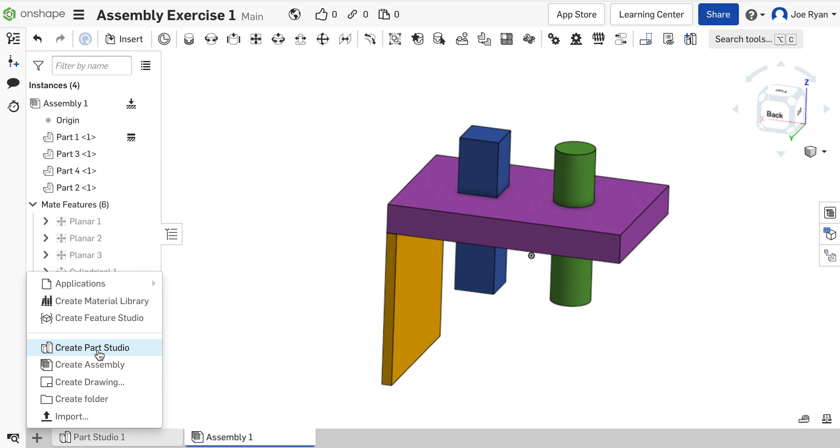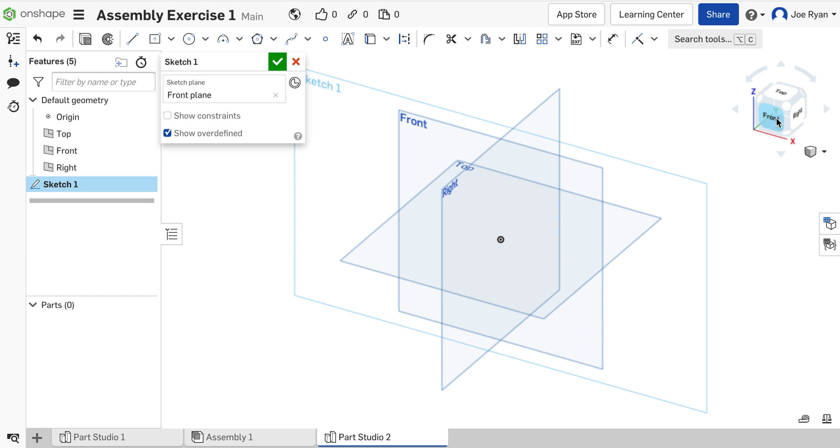Once you have created your part studio, we will be making that rectangular base first. Go ahead and click on Sketch, then select the front plane. I'll click on the View cube to get a nice view of the front plane, and begin to draw my rectangle using the Center Point Rectangle tool from Sketch.

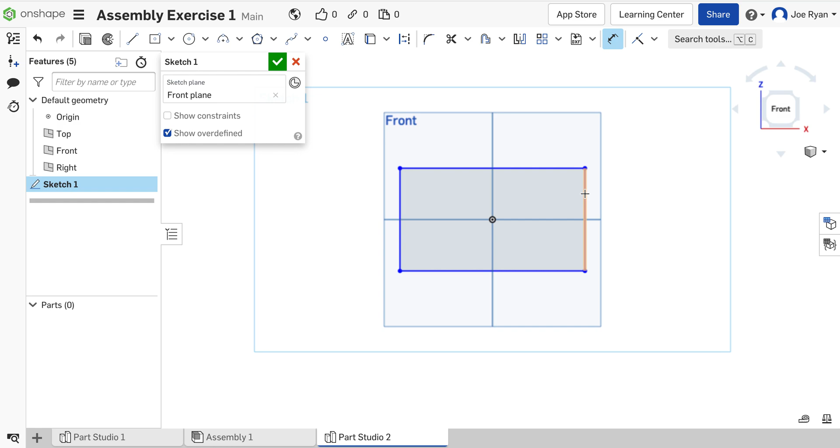I like to draw my shapes centered about the axis, then press Escape. Now let's add some dimensions to our rectangle using the Dimension tool. I'll make it about 4 inches high, then use the Dimension tool again to make it 6 inches long. When you have your rectangle 4 by 6, click the green check mark.

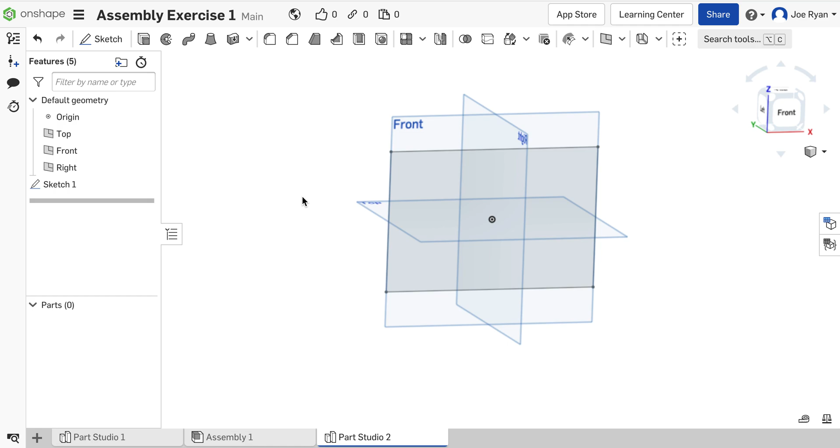Let's add some depth to this part. Click on the Extrude button and select the sketch you just drew. I'll extrude it about 1/2 inch and click the green check mark.

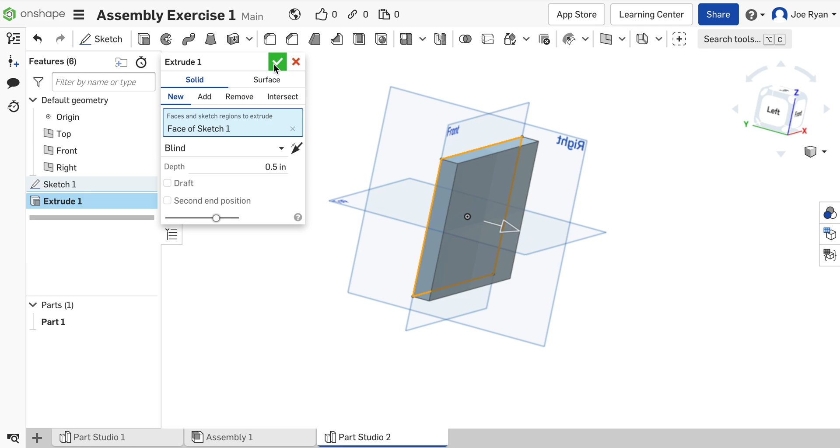The last thing I'll do is change the color of this part. As you can see, I have part 1 down here, and it lights up when I hover over it. You can right click or 2-finger click on part 1 and go to Edit Appearance and choose any color you want. In this example, I'll choose purple, but you can pick whichever one works for you.

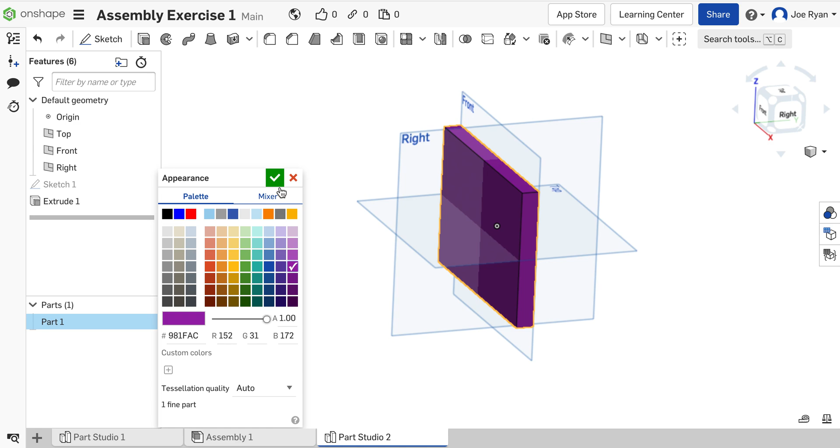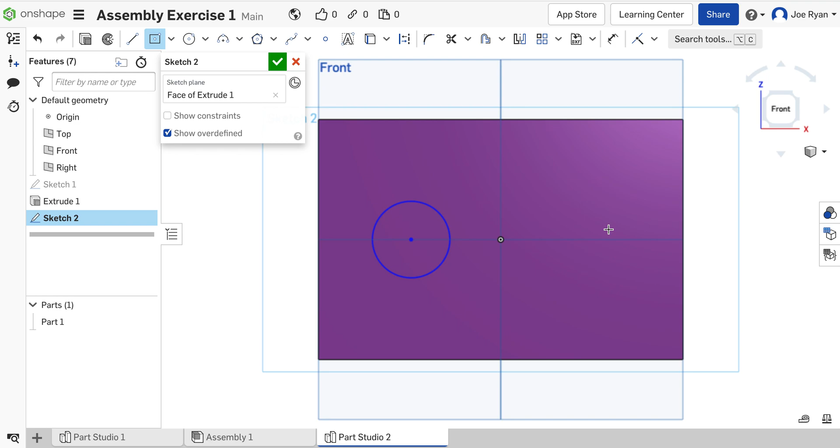Now I need to put a few holes through this part, right? That's where these pegs are going to fit. Go ahead and go back to your front view. You can create a new sketch on the top, and we want to create a circular hole and also a square hole.

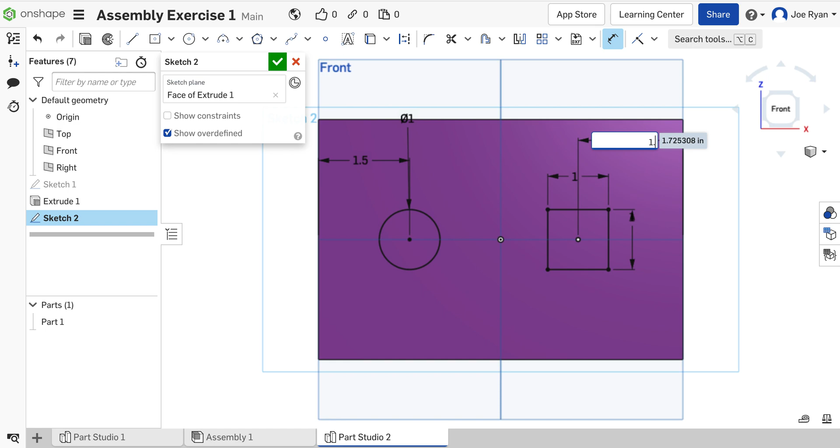Our circle we will dimension to be 1 inch in diameter, and we'll also dimension it to be 1.5 inches away from the edge. Our square will have side lengths of 1, and its center will also be 1.5 inches from the edge. Click the green check mark, and then we will extrude both of these shapes and remove material.

Great, our base is ready to go. Next, we have to create this orange leg.

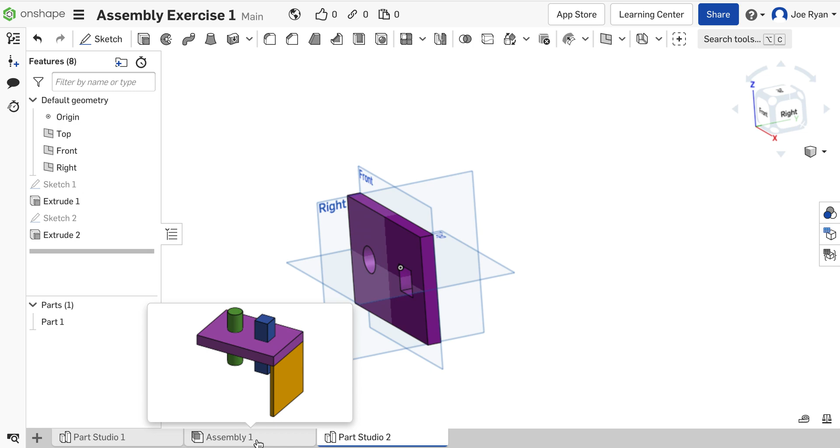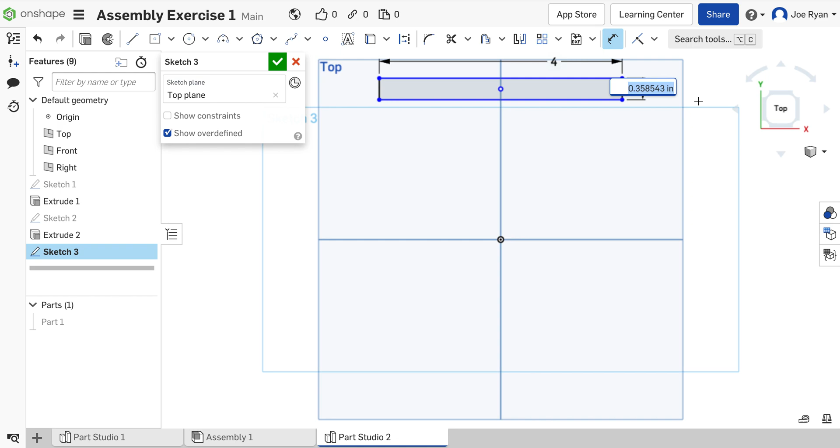What you can do is hover over the eyeball of part 1 and hide it to get it out of the way; we can bring it back if we need to. I'll create a sketch on the top plane for that leg, using the center rectangle command. Let's make it 4 inches wide by 0.25 inches thick, and click the green check mark.

We can extrude that part. Let's extrude it 4 inches and click the green check mark.

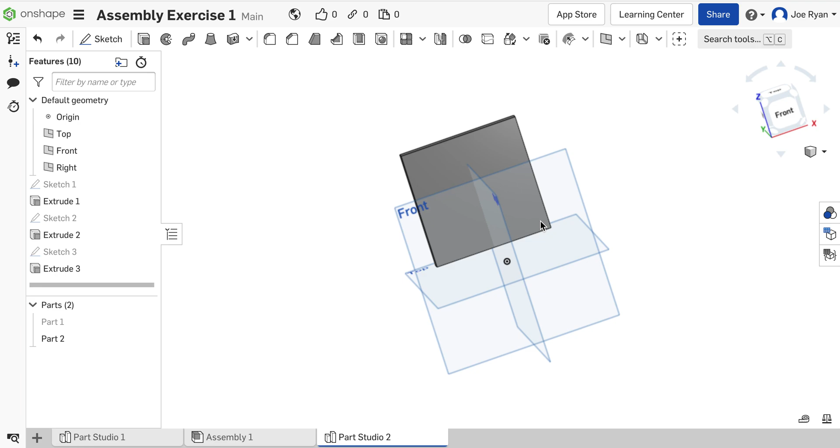Excellent. Just like our previous part, we can change the color of part 2. Let's right click on that, edit appearance, and choose this orange color, then green check mark. All right, I have 2 of my parts.

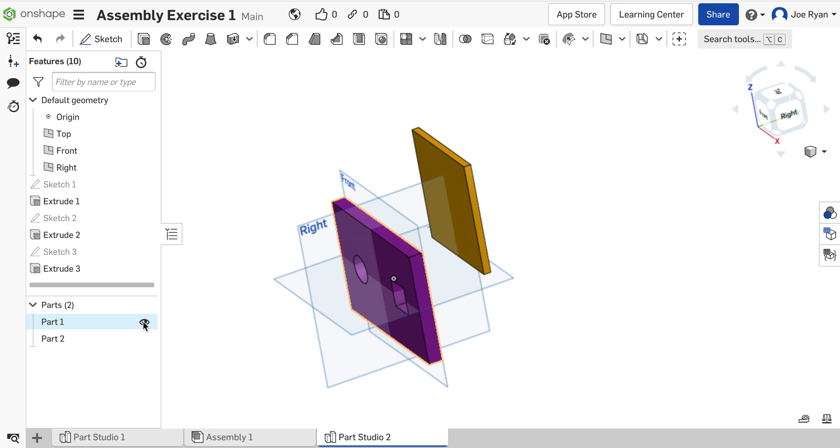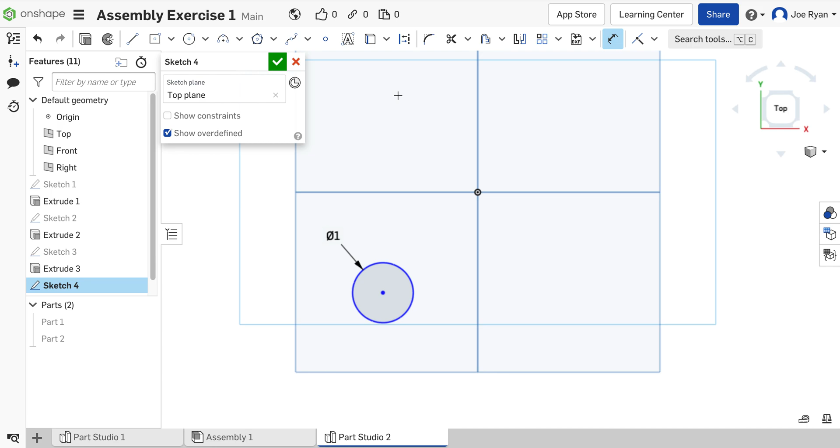Let's keep it going. I'm going to hide these and create my circular peg. I'll create a new sketch on the top plane, use my circle tool, draw a circle, and dimension it to be 1 inch in diameter, green check mark. Just like we always do, I will extrude it, making it maybe 5 inches tall, and click the green check mark.

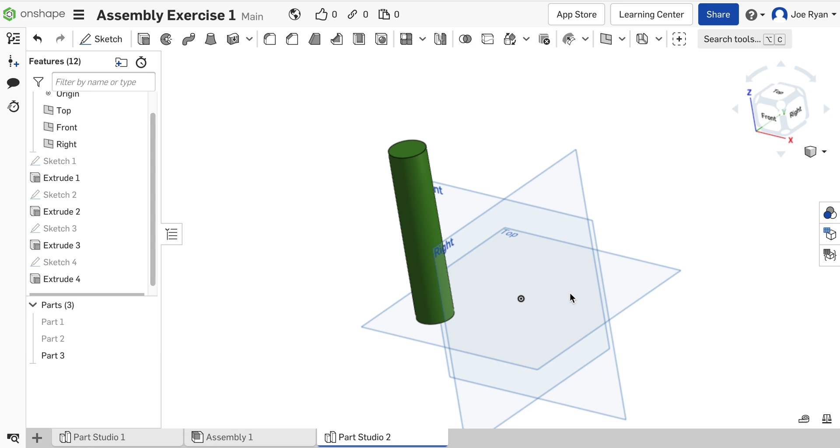Let's see what color I made it. Let's make this green, so you can right click on part 3, edit appearance, and make it green. I will hide part 3, and let's make part 4.

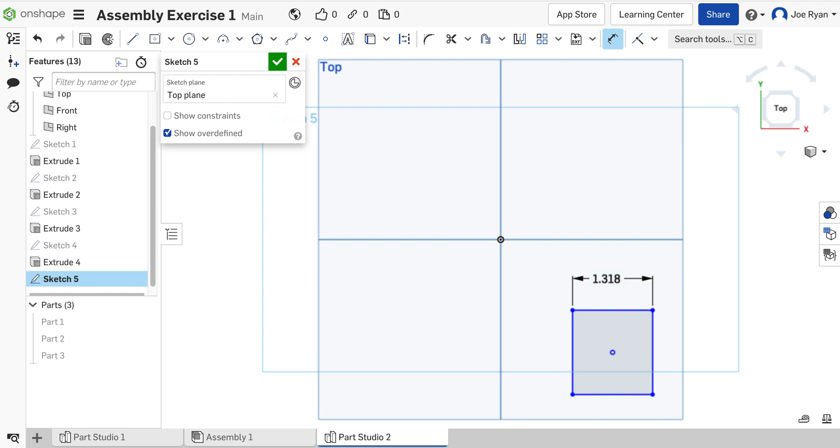Let's sketch on the top plane, top view, and I'm going to make a square peg. I'll draw a square and give each side a length of 1 inch using the dimension tool. Green check mark. How do we make it 3D? We extrude it, and I'll extrude this one to 5 inches as well.

What color to make this one? It looks blue, so I will right click on part 4, edit its appearance, and make it blue. Again, you can make it any color you want.

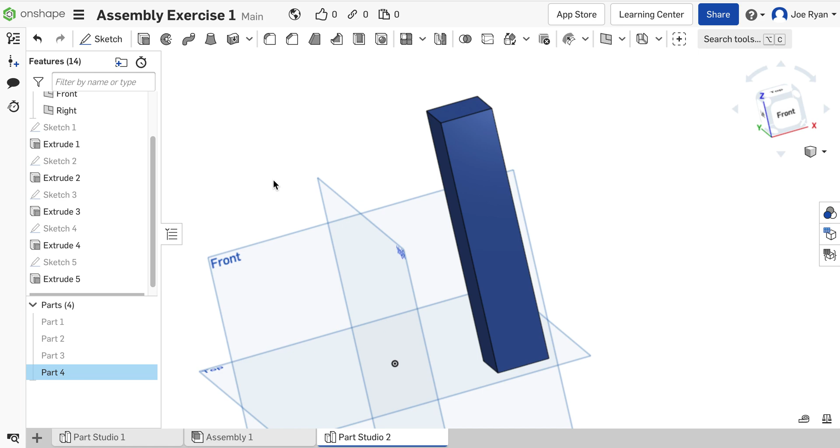So if I look down at my parts list here, I have all these awesome parts. Now I want to see how these fit together. If I was going to 3D print these and put them together, I'd want them to actually connect, and that's called an assembly.

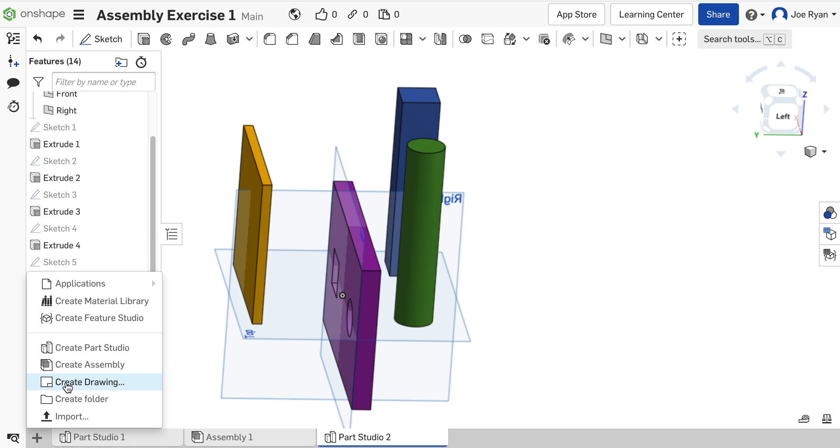So what you're going to do is click on the Insert New Element plus sign at the bottom left and click on Create Assembly. Now you can notice this assembly page is blank.

What we have to do is click on Insert, and we will bring in parts to this area. You can see I have 2 part studios here, but you should only have 1. What you will do is click on the part studio where you created all those awesome parts, and you should see them listed out.

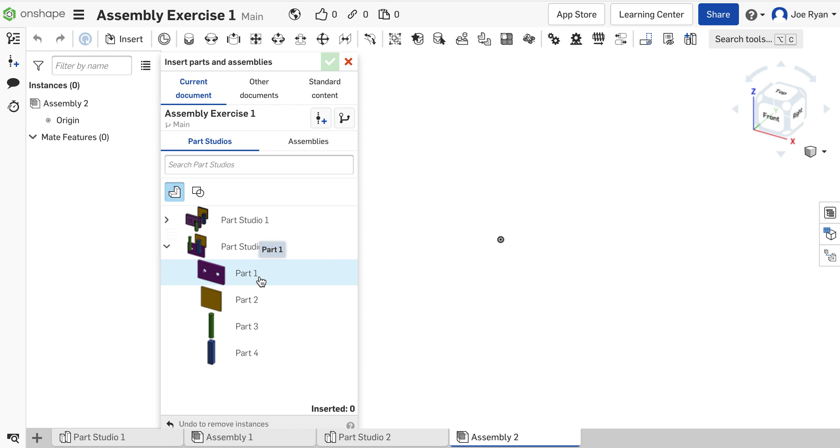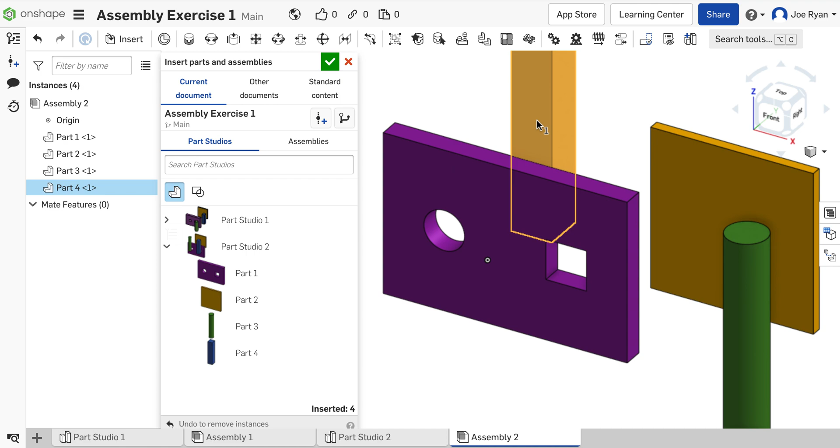You can then click on the part you'd like to insert, then click once in the workspace. I'll bring in the purple base, click once on this leg, and click once in the workspace. I'll click once on the green peg, then click once in the workspace, and lastly let's bring in the square peg. Once you have done that, click on the green check mark.

So you can see all my parts floating around. If you click on any part, you can move it.

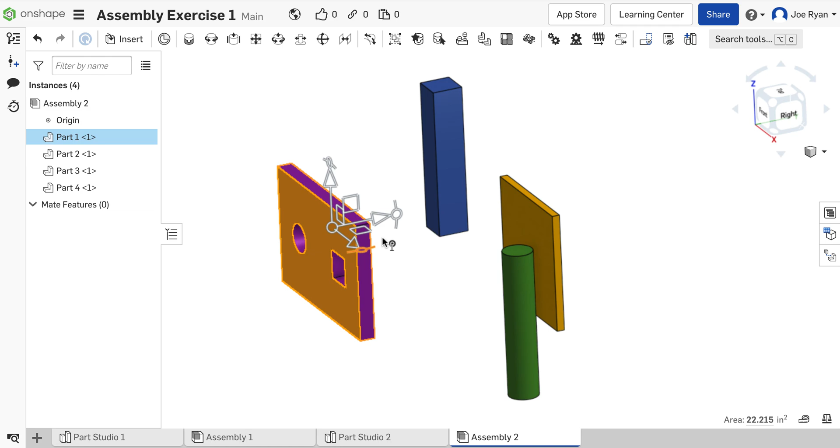I'm going to use this purple part as my base, and I'd like to rotate it. I'll click once on it, and you can see these arrows. If you click on the little circle with the lines in it, it lets you rotate your parts. I'll rotate it so it's facing up and down, then drag it out of the way.

Now I don't want this purple part to move around while I'm placing the pegs inside of it, that'd be kind of difficult. So I can do something called fixing the part, like nailing it down or gluing it down so it won't move around on me. To do that, I'll right click on the part and select fix.

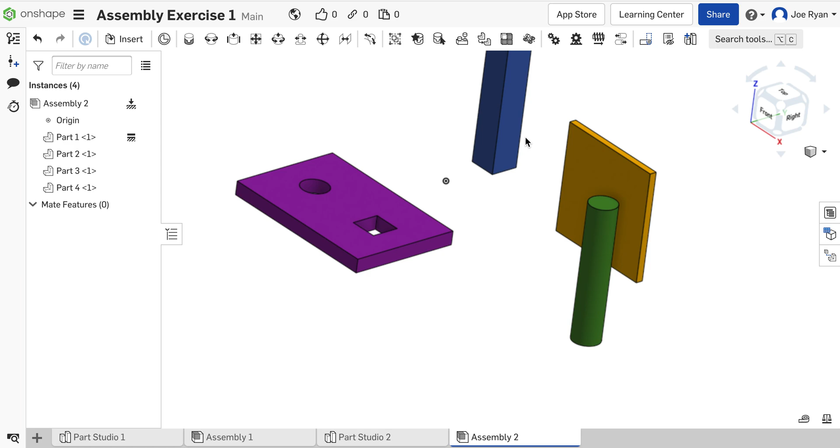Now, how do I bring in these pegs to mate with this part? That's what all these buttons up here are for. We're only going to be using the Planar Mate and the Cylindrical Mate. You can experiment with the other ones if you'd like. But let's first connect this leg to this purple base.

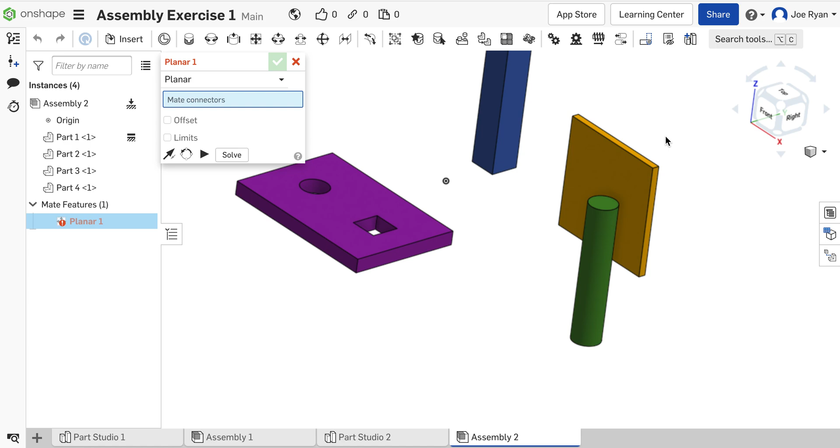To do so, click on the Planar Mate command. The Planar Mate takes two flat surfaces and squishes them together. So the two flat surfaces I want to mate, I'm going to select right now. It says Mate Connectors. I want to squish the top. You might have to move your mouse around a little.

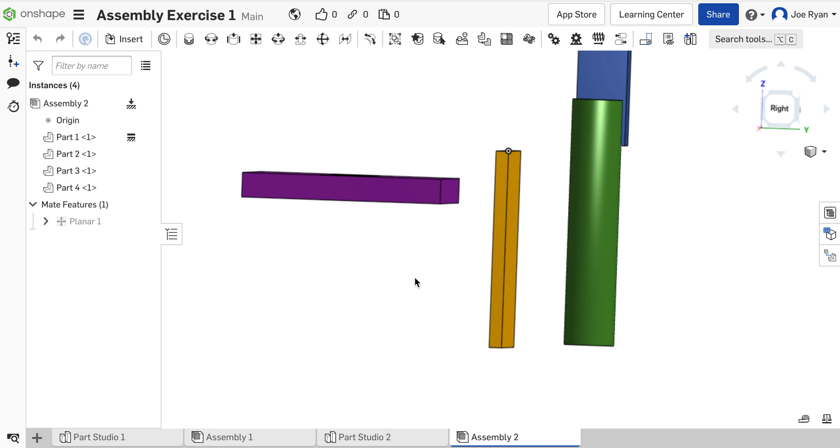That's the one I want. I want to squish this top face to the bottom of my purple part. So if you see I move this around... whoops, not sure why that moved all the way over there. Let's move him back in.

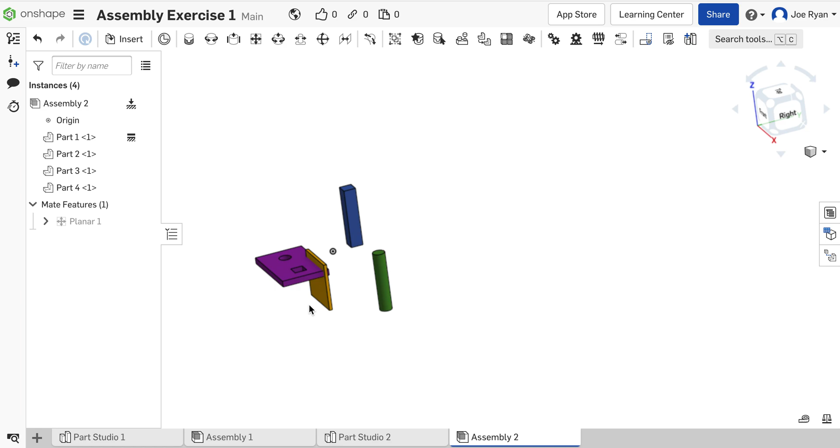Sometimes this will happen in assemblies, gets a little confusing, but you can just zoom out and drag your parts back in. For some reason it didn't look like that mate worked the way I wanted it to, or I'm not exactly sure if it worked. It's kind of tough to see. No, it didn't actually do what I wanted, which is perfectly fine.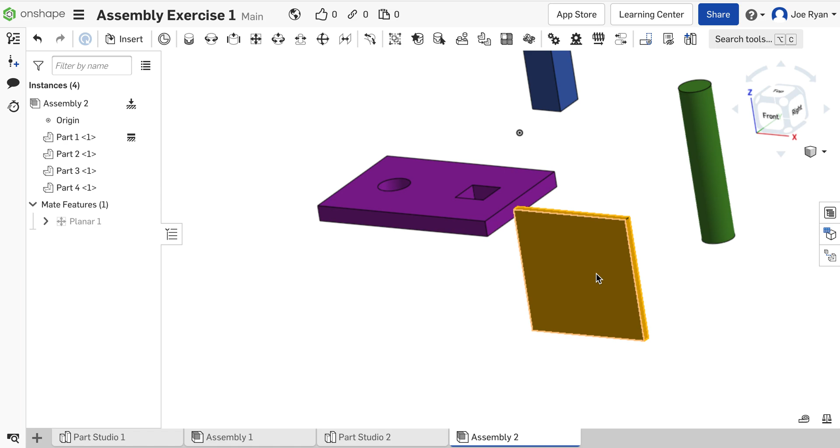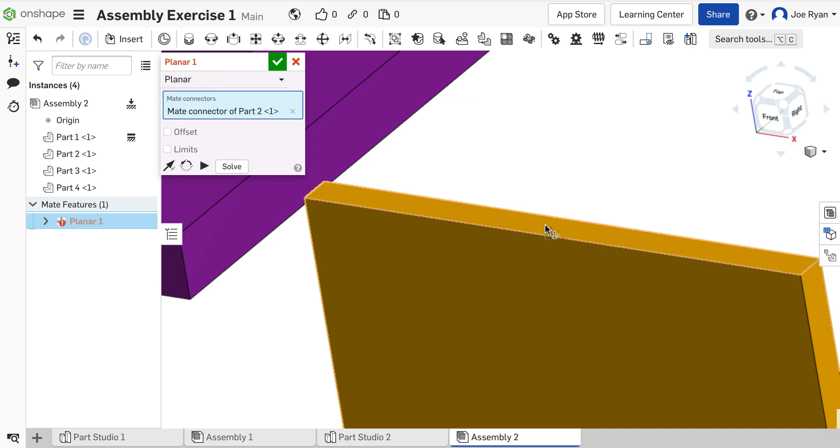What we're going to do is go over to this mate, click on it or right-click on it, and delete it. Let's try it again. I'm going to go to Planar Mate, select the very top face of this part, and then select this bottom face. There we go.

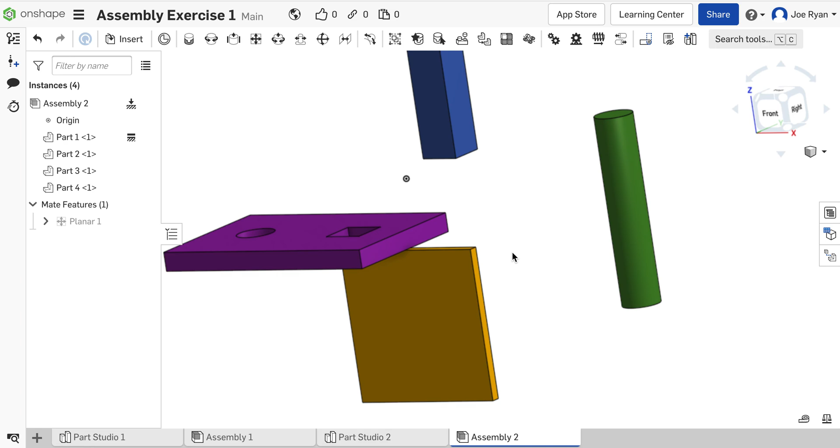I'm actually happy that happened, so you could see how to delete a mate if it does something crazy. Sometimes Onshape will do something you didn't expect it to. You can see these parts are now kind of stuck together. I'm going to click once on this part and rotate it into position.

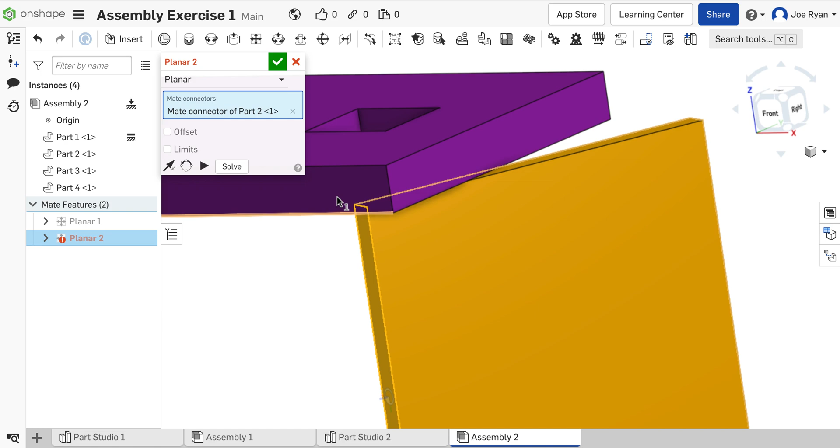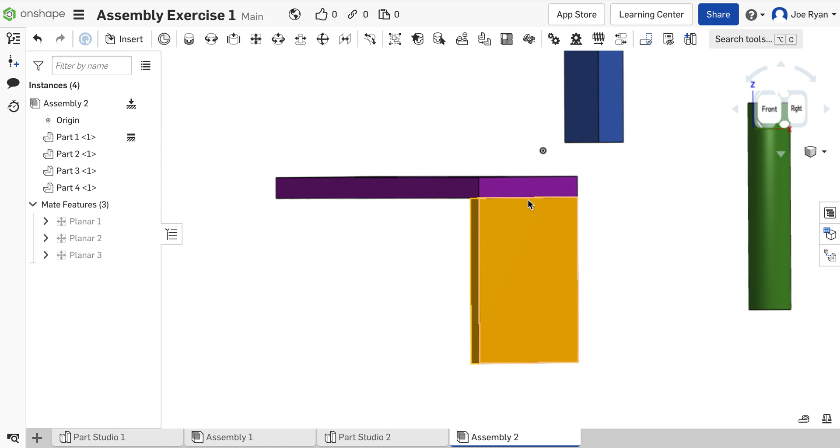I actually want to mate this edge and this face together. So I'll click on my Planar Mate, select that flat face and this flat face, and click on the green check mark. All right, we're almost there, and now I want this flat edge lined up with this flat edge. So I can click on the Planar Mate one more time and select both of those faces. Now we have this yellow leg perfectly fixed to the edge of the purple base.

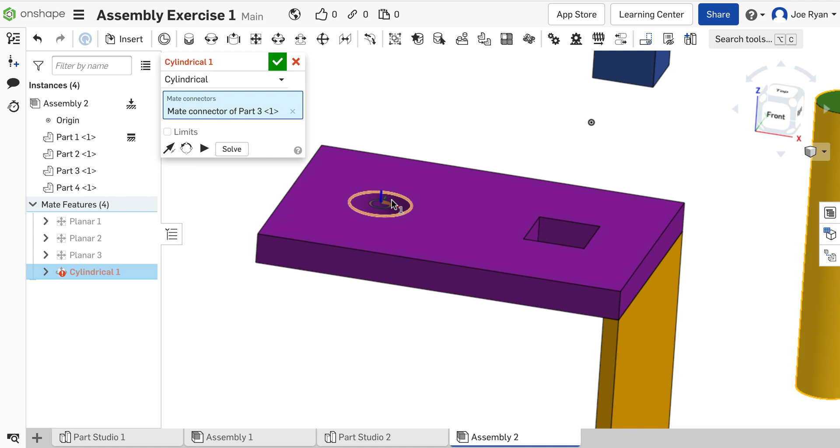Now let's get this green cylinder into place. This one's actually very easy, you use the Cylindrical Mate, go figure. So click on Cylindrical Mate. The Cylindrical Mate takes a round part like this cylinder, which I will select, and connects it to a round hole like this one. Click on the green check mark, and there you go.

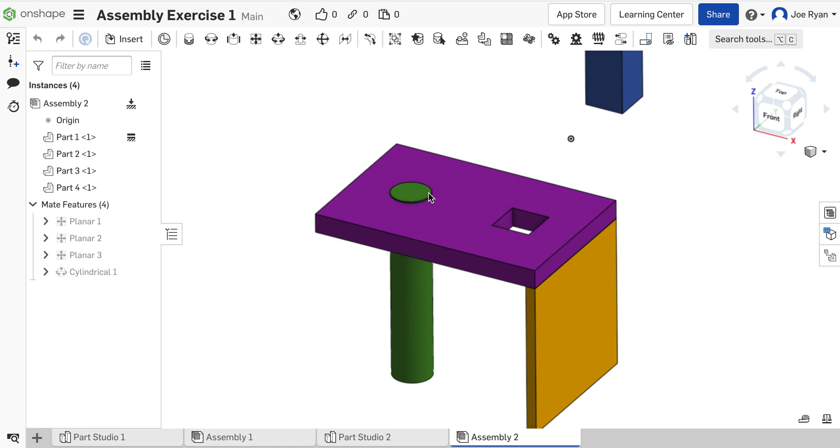Notice that I can drag this part up and down. Let's say I wanted this face fixed, like if I wanted this peg to never move and be lined up like this, I could use a Planar Mate to mate this face with this purple part. But I want it to move freely, so I will leave this as is.

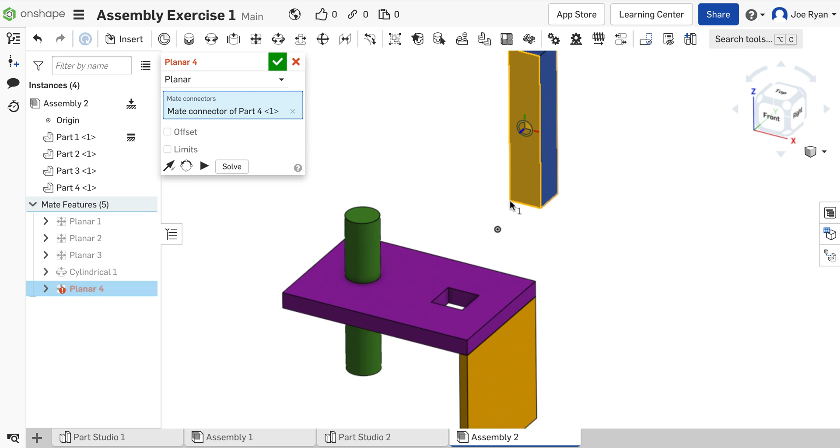All right, and then our last part, we have this square peg in this square hole. This one is a Planar Mate, just like the orange leg. Click on Planar Mate, and then we want to mate this flat side with this flat face of the inside of the hole. Sometimes it's a little difficult to get there. That's what I'm looking for. And I'll click the green check mark.

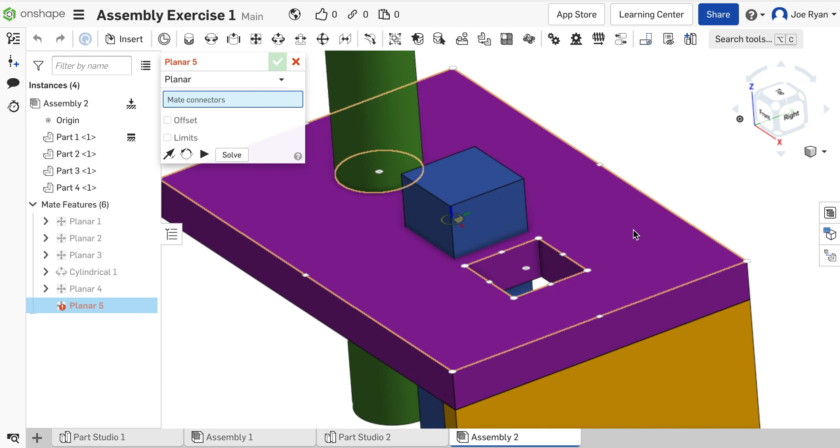Now this last mate's kind of tough to see. I'm going to actually move the peg out of the way, and use that Planar Mate again, and mate, let's say, this face with this side of the square peg, and click the green check mark.

So if you did this correctly, you should have your square peg, your round peg, and your leg all fixed together. You can click the share icon and share this with your instructor, or snap a screenshot and turn it in that way. Thanks for watching, and good luck making more assemblies in Onshape.